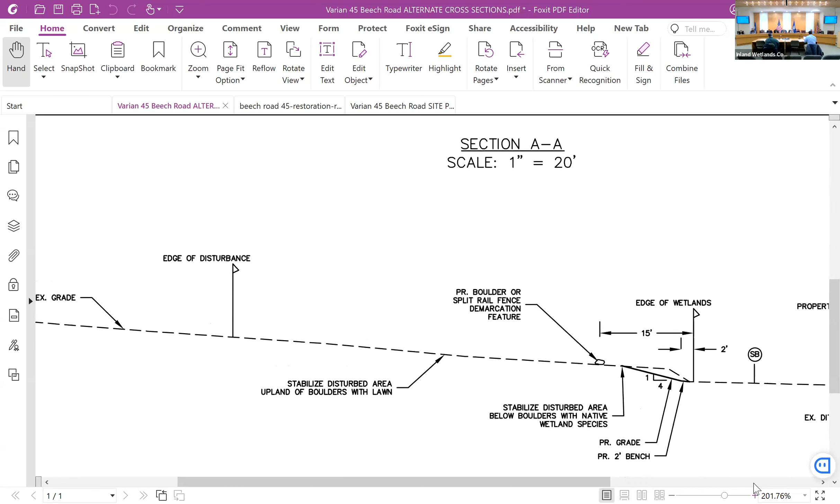Flip to this here. All right, so now you can probably see this a little better on the screen, and I'll really blow it up. So one of the things, the initial plan—this is the cross section that was proposed under sheet S1—was we were starting at the edge of wetlands and then just grading up 4-on-1.

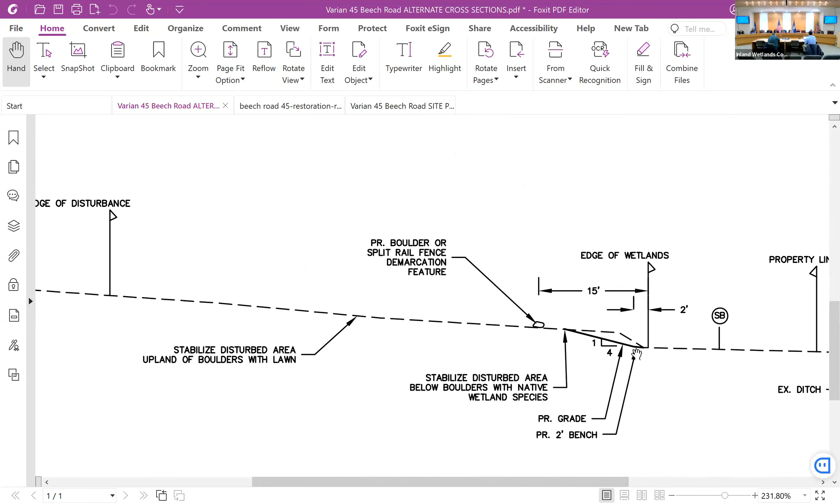What that does is it takes out about another 12 cubic yards along the entire bank of the wetlands. So that brings us to 70 cubic yards. So that's not quite halfway, but it's more than what we initially asked for. I think it gives the commission a little bit more satisfaction as far as fill removal proximate to the wetland.

We've demonstrated from the soil testing that the soil is able to stay in place and not have an adverse impact on the wetland, and that was really the only outstanding item as far as last month. So we're hoping that we can close this and move forward tonight. This has been going on since May. I know this commission is probably tired of this application, as is my client and as are the neighbors—we would like to get this put to bed.

With that, if there's any questions, let's get into them. Any questions, any comments? Should we start there?

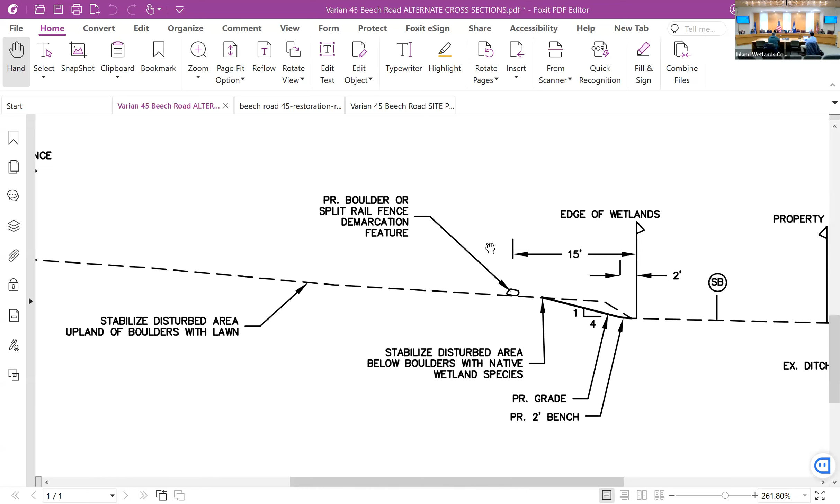On this particular location, you do have a fairly intact wetlands along the front of this property that has a watercourse in it providing habitat, water purification, and rehabilitation of the site. To have this fill literally at the toe of the slope of it does make me, as the administrative agent, somewhat uncomfortable. I've been doing this for a long period of time.

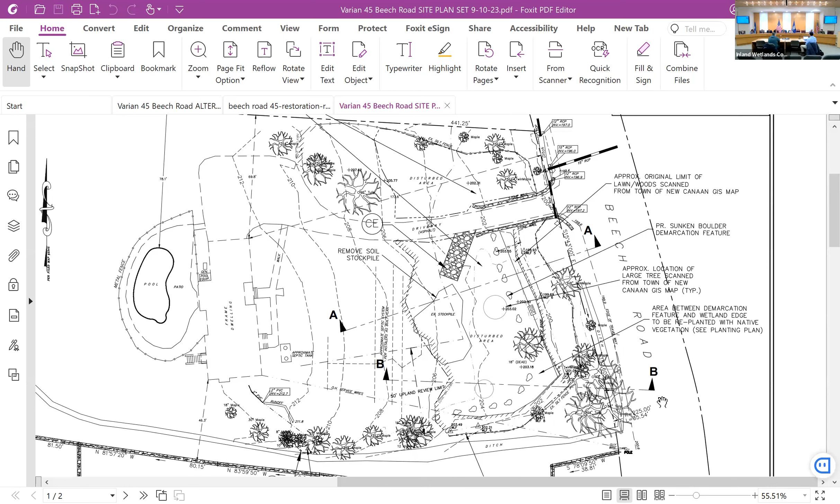I think we probably do have some soils that have migrated into the wetlands that haven't really been mitigated. Some soils were taken out between the April filling in of a portion of the wetlands and where you are today. That was not authorized by this commission. That was taken upon yourself to do, perhaps trying to get ahead of what you thought might be the end result of the commission.

I have had discussions with the applicant, Rob, and Mr. Varian about this particular violation since April, trying to get to the point where hopefully the commission would be comfortable with what it is you're proposing. I'm not comfortable with what it is that you're proposing. So maybe commission members might feel differently on an application such as this.

If this was a clean slate and you were coming in, as we had talked about hopefully in January of earlier this year, I probably would have had in my mind, once I knew the criteria around your particular lot, the slope of the land, the type of wetlands on the site, what you were intending to do with a usable play space for the family.

We have a 50-foot upland review area for a reason. To go down to 15 feet might be comfortable to have your toe of the slope, where your disturbed areas and your actual lawn would be at least 15 feet from the actual flagged wetlands, which was difficult to evaluate. So Otto Thiel, the soil scientist, did the best he could with the fact that there was 4 feet over this wetland.

So we have now established the wetland line. I think 2 feet is a step in the right direction, but I don't think it gets me comfortably there that wetlands will be protected at the end of the day.

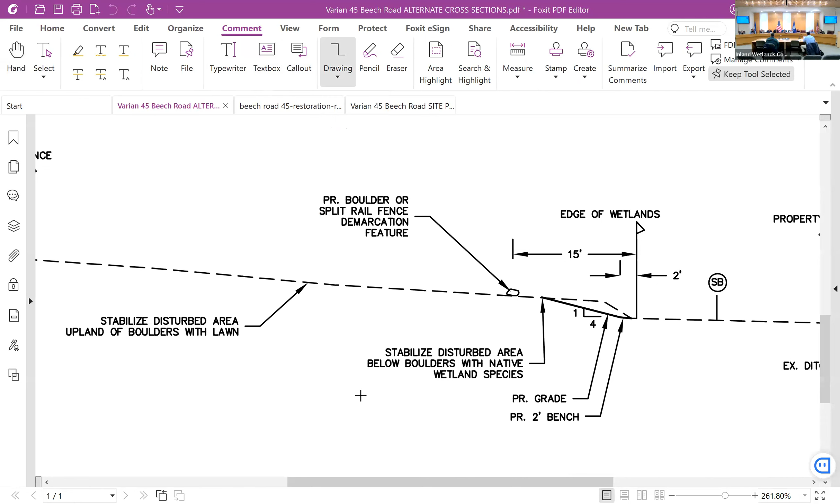How deep is it? I have the scale here, but let me just draw. What is it, quick, 20? Is that 20, my guess? So let's assume that, for lack of better information.

So I've just put a red line. This flag here that I'm showing is the edge of where the lawn was, where the disturbance started. If we drew a straight line from there to where the wetlands flags are, let's assume that was the original grade, because we have two boundary conditions: the top of the slope, or old edge of disturbance, here, and the wetlands edge.

Which is back down to original grade there. So this wedge that's in here is roughly what the fill pack that was brought in looks like.

So if using Kathy's thing, what we would do is basically assume this is this point right here. Let me draw another line. Here's 15 feet, and I were to go something like that for my new slope. So now, if you can follow my hand here, let's see if you can see it. This whole wedge would come out.

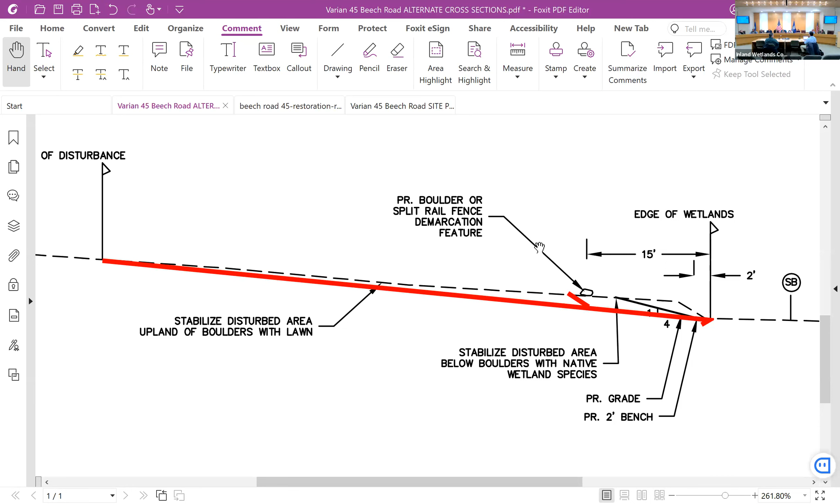Anthony, do you think 200 cubic yards is a significant amount of material? No, if the spot is big enough, I don't think it's a lot of fill to move.

It's also not a lot of fill to truck. It's 10 trucks, right? It's not bad. 7, large trucks. That was my calculation. I understand that, and I understand everything costs money.

Also, it's been tested and certified as clean, so that's the good part. You don't have to truck it as contaminated. So at least I got that going for me. Yeah, it's not, you don't have to truck it as contaminated either, to Kathleen's point.

So, I mean, again, I think in the spirit of wrapping it up, for a couple thousand dollars, wrap it up. I would rather not leave it vague with wood chips and trying to figure it out, that's a little too vague for me. Had we known that going in, and done some sample testing and you said this is what it was, then, but I think that's a little too vague to be trying to work it out in the field, personally, for me.

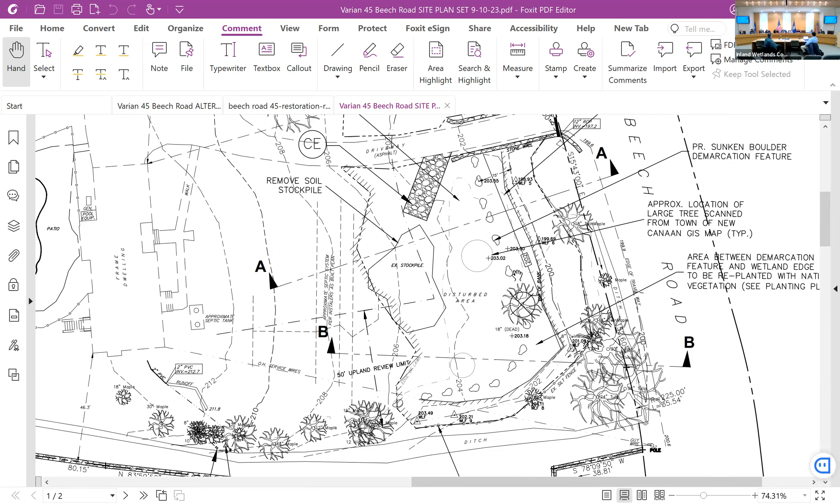I think the investigation that he did - I was there for that portion. He dug down along those foundations to determine the footing, since that wasn't done by anyone involving his team. Off the top of my head, it was about 400 square feet of impact - basically taking the area of the wall and offsetting it by a foot, figuring they were working around it. My point was, we're proposing 2,200 square feet of mitigation, so I think the mitigation we're doing offsets the disturbance done for the wall.

I'll add that to the wetland permit that gets issued, that this activity is included in the permit. The only thing you might need to change is the DEP reporting form, which may have a calculation change on that - we'll get that corrected as well. So I just wanted to make sure they weren't going to have an issue in the future. Thank you.

Any other comments at all? Anthony, I'm good, you good? Down there, Adam? Good, okay.

So I move approval with the conditions, as specified. Who wants to second it?

Anthony? I don't think he can vote. He can't - no, he wasn't here through the entire thing. I'll second it. Who's gonna second it? Sandy. Andy, Sandy. Okay, now let's decide who's gonna vote. Sandy, you can vote because you've heard both sessions, right?

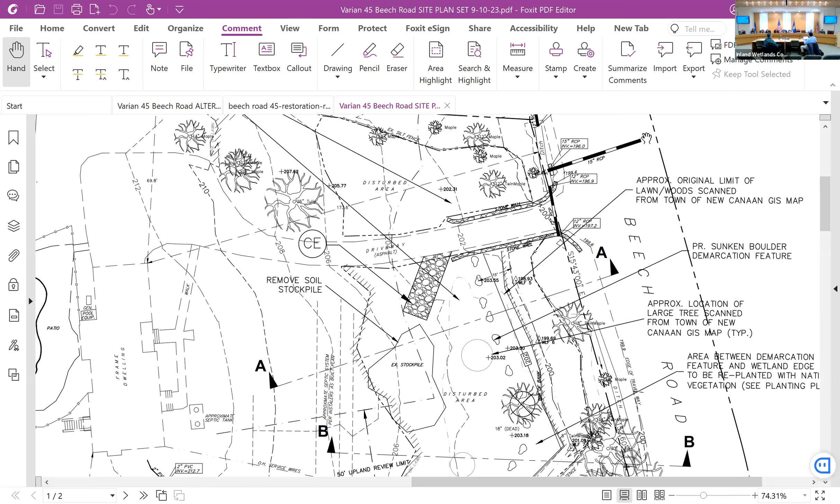Thank you very much, and happy Thanksgiving. Thank you. Let's get this thing done. Thank you very much. Yes, keep in touch. We'll keep pushing forward. You know where I live. I know where everyone lives. All right, thank you very much.

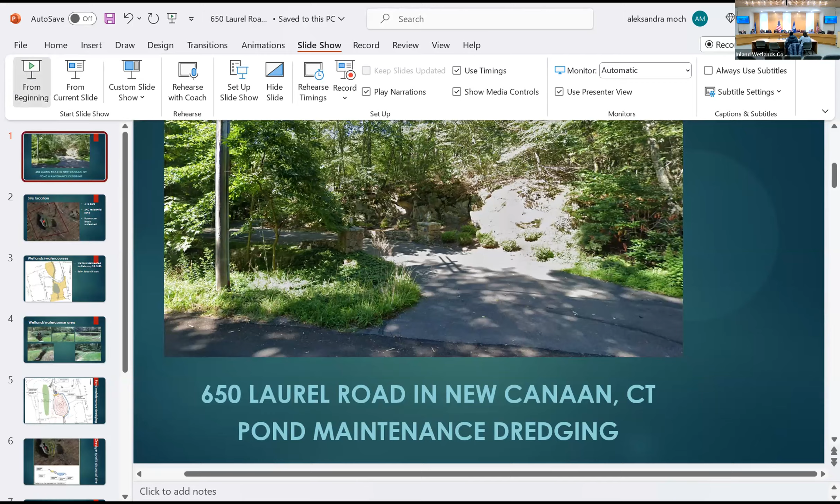So today I would like to present a slideshow and introduce you to our project and the property. So here we go. It's 650 Laurel Road in New Canaan, and you can see the view from the road. And here's the bird view.

So you can actually see that this property is quite interesting. You have the single family residence located within the central portion of the property, and it is surrounded by lawn, but there's not much lawn. Then on the front of it, you can see the slope, and the slope goes down, and then you have the pond and the pond area, which is maintained as a meadow. The whole area is surrounded by quite a large woodland area, so it is being preserved in a quite natural state. It is a 4.13 acre site, in residential zone 4AC, and also located within the Poorhouse Brook watershed.

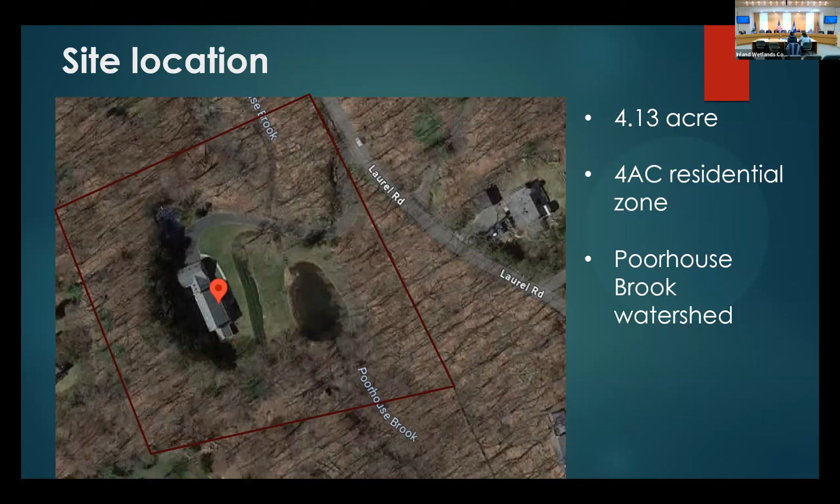Here are the wetlands. I was the one who delineated the wetland on February 25th this year. The soils found there were Saco silt loam, which is a very poorly drained soil, very wet, seasonally flooded. In yellow, you can see the wetland, and going from the top of the slide, we have a red maple swamp environment here, then a Poorhouse Brook crossing, then a pond down the stream, and an area maintained as a wet meadow, ending with another red maple swamp environment. It's a beautiful mosaic of different habitats, which are very important for wildlife.

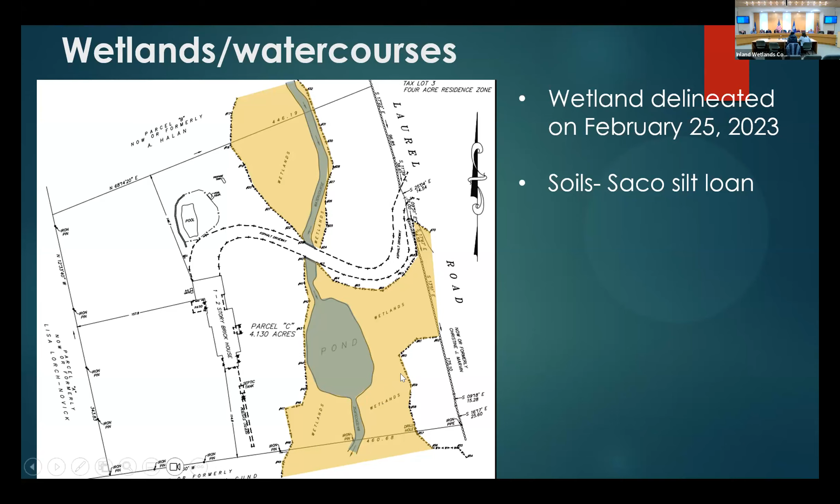Here are some pictures, starting from the top, you have a view of the driveway crossing through the brook. There are 2 pipes which allow the water to flow through. Then going to the next picture, this is the brook, which is making its way to the pond. Then we have the pond, which is surrounded by a meadow. It looks a little bit like a lawn, but actually it's not, because it's not mowed on a regular basis. The bottom picture shows the brook leaving the pond, and the last one shows the edge of the red maple swamp.

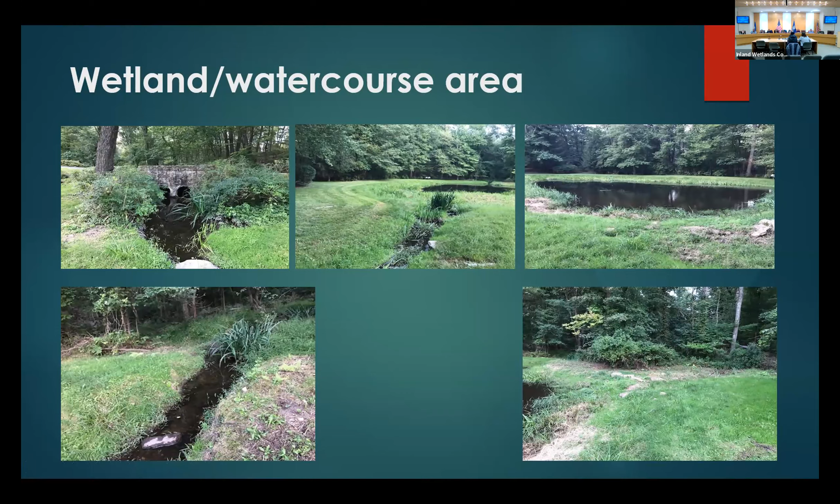Here's our project, and what we're proposing, as you see, the pond is existing and is getting very shallow, and we would like to manage it. Once you establish a pond, unfortunately, from time to time, it needs to be managed. It's getting shallower because the stream brings a lot of sediment, especially during storm events. You have a lot of sediment in suspension carried to the pond, and it's just a matter of time for the pond to get shallower and shallower.

So what we are proposing is to restore the pond, and the way we're going to do this, we're going to come down the driveway along the arrows, do the crossing with our excavator, and then go down towards the pond. We will use proper erosion control. The orange line is the silt fence, a double silt fence with hay bales in between, protecting the rest of the wetland areas to stay intact.

At the entrance of the brook, we're going to install a forebay, or plunge pool. I would say it's a mini pond. The way it works is it slows down the energy of the flow and captures some of the sediment. This way you can keep the sediment within the forebay and prevent it from getting into the pond. So you basically extend the lifetime of the pond.

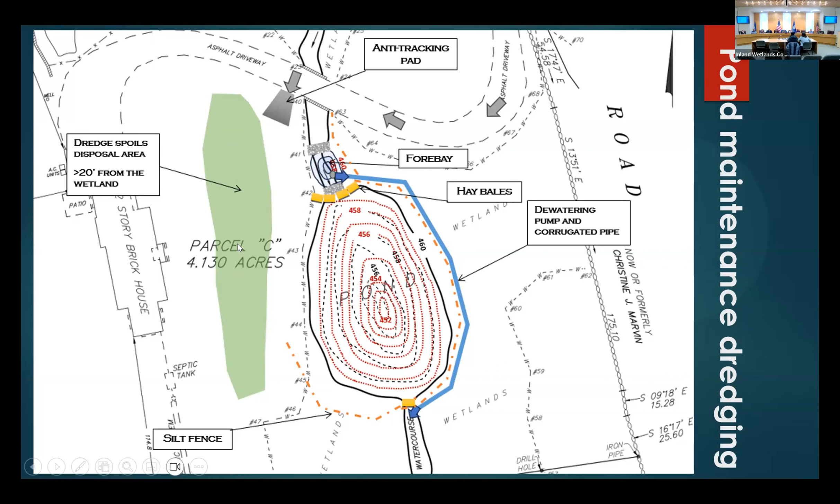This is actually a very interesting method I've heard of how it's going to be done. Along the edge of this area, we're going to dig a trench, and the trench is going to create a physical barrier, but also absorb all the water draining from the wet sediment. So this way we're going to be dewatering the sediment, and this is actually going to be the final destination of the sediment. Here's a cross section, so you can have a better idea.

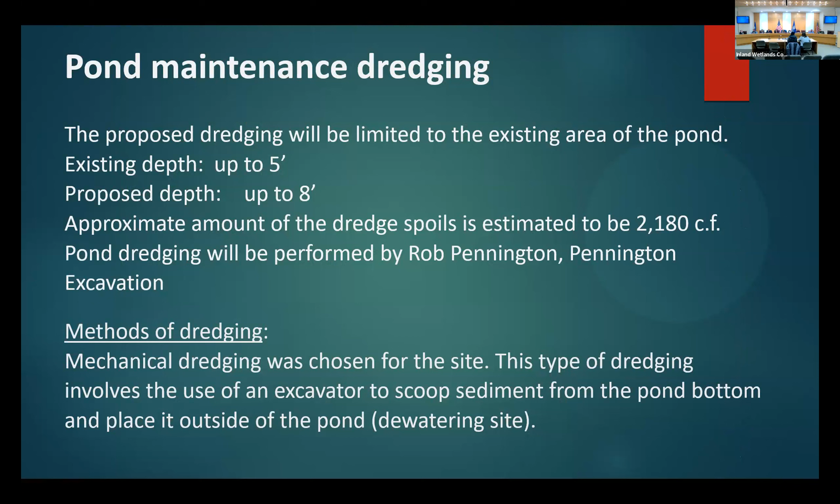So we're not going to be exceeding the pond. The area of the pond is going to remain the same. We're not making it bigger or going anywhere else, we're basically just going to make the pond deeper. The method of dredging is going to be mechanical dredging, because in this kind of setting it's a better choice and also more economically viable.

What are the values of dredging? There are benefits, not only aesthetic, but also for wildlife and long-term health. As ponds start shallowing, the water heats up and loses oxygen, and hypoxia causes fish kill and affects other aquatic organisms. So maintaining the depth and health of the pond is very important.

Also, accumulating with the sediment are a lot of nutrients, and those nutrients cause problems such as algal blooms and overgrowth of vegetation. Whenever there's vegetation overgrowth, the dead plant material accumulates, filling in the pond and creating a high-nutrient situation. So with the sediment removed, the nutrients are removed too, and the pond will be healthier.

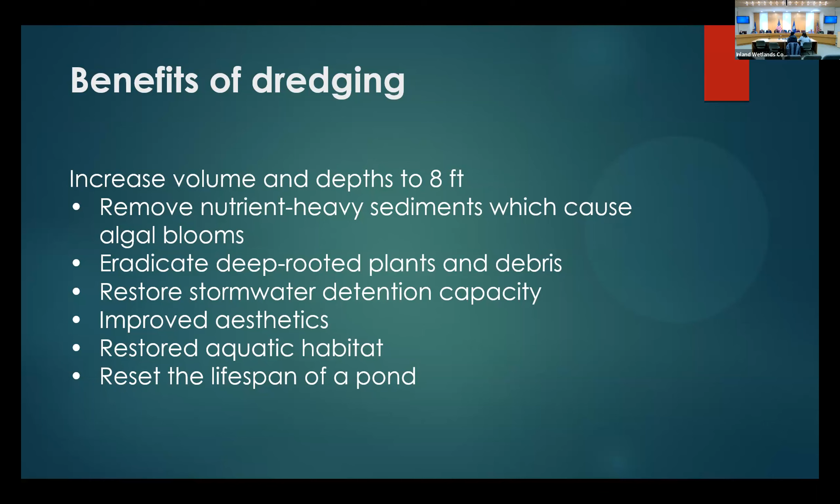And this is my presentation. I'm here to answer your questions. Mark Helen is here with me, and he's the owner, so feel free to ask him as well.

Good presentation, yeah, very good. I've been meeting with Mark and his family on the pond for a little while, so Mark put a lot of work into getting it to this point, and Alexandra has brought it over the line.

So this pond, I think your application said was done in 1997. Yes, yeah, so 98. 98, so it was created in 1998. That embankment is likely where they put the other fill when they dredged the pond.

I didn't really have too many comments on this because to me it's pretty straightforward. Everything Alexandra has established on the record is accurate. The pond health will be improved post-dredging. It's certainly aesthetically pleasing to have a nice pond for this location, since it's centered on the property. Rob Pennington is an experienced dredger, and I believe he'll be doing the work for you.

I wasn't sure of the sizing of the basin they're going to put in, which is a good thing to do right now. The pond doesn't have a sediment trap at the beginning. Once the pond's clean, they can hand clean that trap periodically rather than doing a full dredging for future projects.

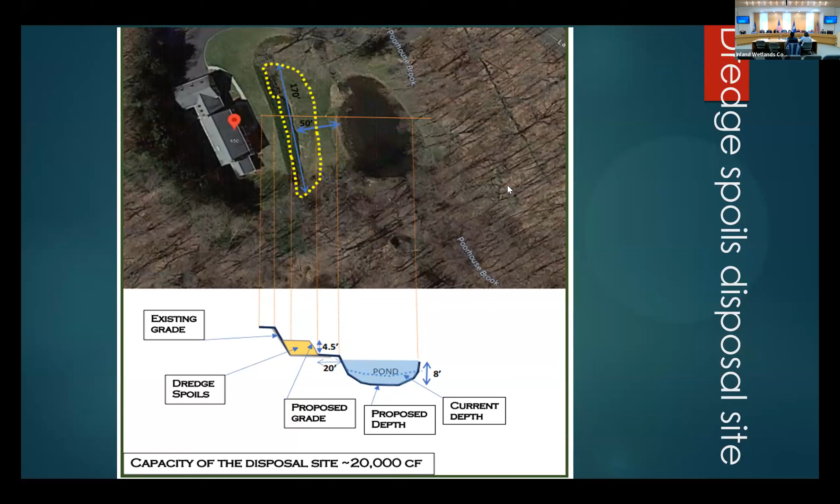Joe. Joe's gonna have to pronounce his last name. We take a couple vowels out, let's make it easier. Good evening, everyone. How are you? Good. So I'm Joe Sanastero.

I'm the owner of All Terrain Services, and I'm representing Lance Minor and 845 West Road. We were requesting to do maintenance, removal of silt. We did this pond, we dredged this pond 7 years ago. Some of you remembered the site when we went on the site visit.

Yeah, and since it's a quick running stream that goes through there, quite a lot of sediment ends up going to the same area. And since this pond is fairly close to his house, if he gets too much of an overflow rain, especially like in March when we have the snow thaw and heavy rains, the water will come into his house. So that's why we did it 7 years ago. We did an extensive dredge back then. And now looking at it again, we're seeing that it's accumulating in one corner of the pond.